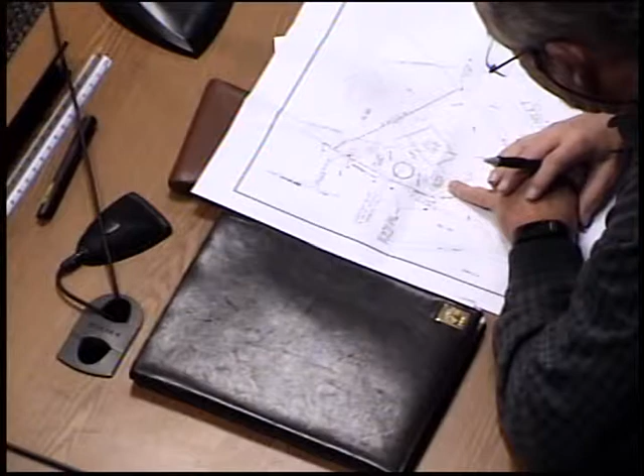Well, if it's not within the wetland, we put it in the plan only to denote that, as part of our plan, that tree is subject to be removed. That's fine, we don't have an issue, you can take that tree.

So if you're going to remove the fence, where is it going? The fence is actually going to go right along our property line. It does not take that jump. It borders right along the flags, as denoted, going right along the flag line. It's not going to go into the wetlands.

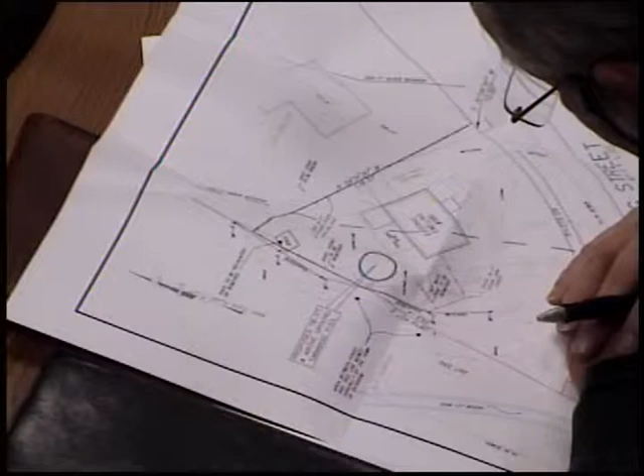The closest it comes is flag number 4, which is behind my shed. So that's the closest the fence comes to the wetland. That will be the new fence. The existing fence is again wrong.

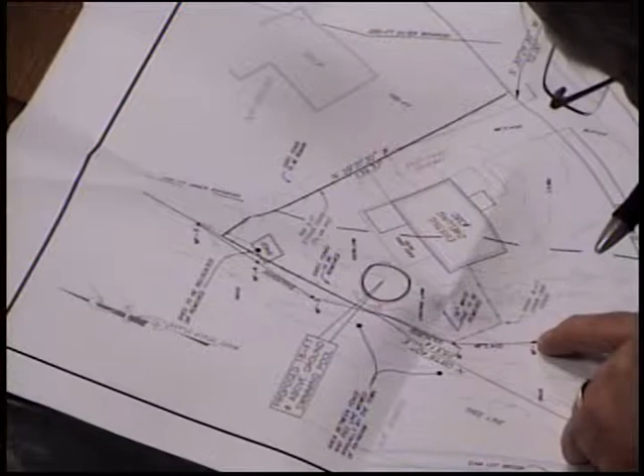So it's not within the 25-foot either, if that's the wetland flag. And this was done, when was this wetland flagged, do you know? I would have to look at my check. It was flagged this year, actually flagged I want to say early November, when we started this process, I believe.

How long have you owned the property? It would be 3 years in August. So I think that's before our bylaw anyway, before we initiated the 25-foot no-touch bylaw. Well, right. So we moved in 2012.

Okay, anybody else have any questions for the gentleman? So you're going to relocate, take that shed out of there altogether? The shed is going to actually be moved, since it's deteriorated anyway over the years, even when we moved in. It's fallen off its own foundation, so eventually it needs to be taken down and reconstructed, but at this present time it's going to stand where it is.

Okay, I do have a question, because I have a pool myself. When we drain the water out through the filter and stuff, where's that water going to go? Currently at this point, we can't drain it into the wetland. That's my point, chlorinated water, that's what I'm trying to get at. You really don't have a lot of play between the pool and the wetland.

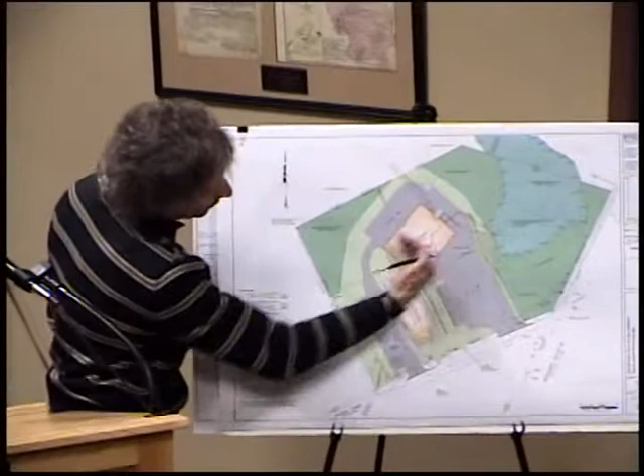Between the last time we met and this time, we got good input from the commission with respect to the site layout and other elements of the design. One thing I'll point out on the revised plans is the parking area. If you recall, we had slope grading going into the 25-foot buffer. We looked at the turning movements within the parking area and determined we could move the pavement edge over so that the pavement is outside of the buffer, and we're going to do a ready block wall along that side.

As opposed, yep. Stone. Stone wall, not ready block. Oh okay, it's going to be a stone wall. So all activity is going to be pulled outside of the 25 foot buffer. Good.

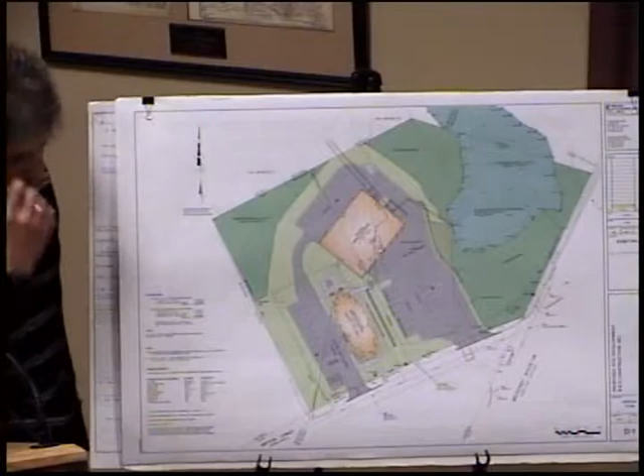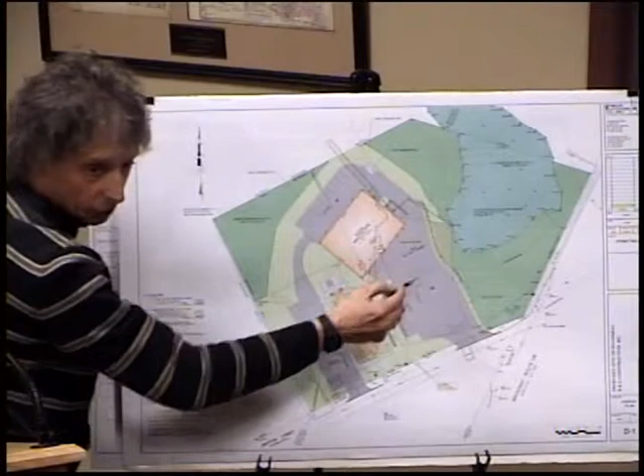The other item we talked about was leaving the post and rail fence as a deterrent for off-road vehicles along the location as shown on the plan. We're going to do stone posts spaced 25 feet on center along the 25-foot buffer line with sign placards identifying it as a restricted 25-foot area, no activity beyond this point.

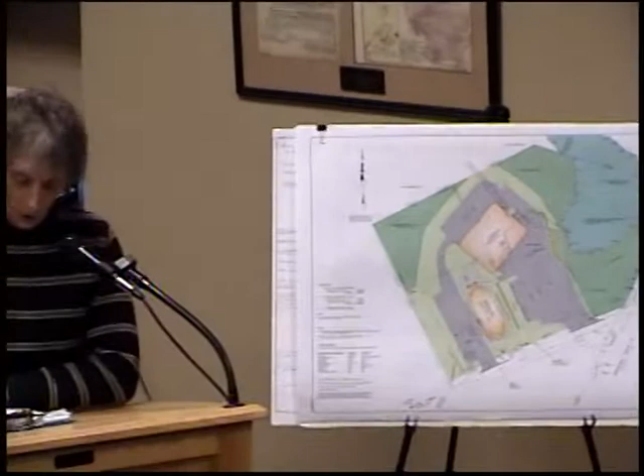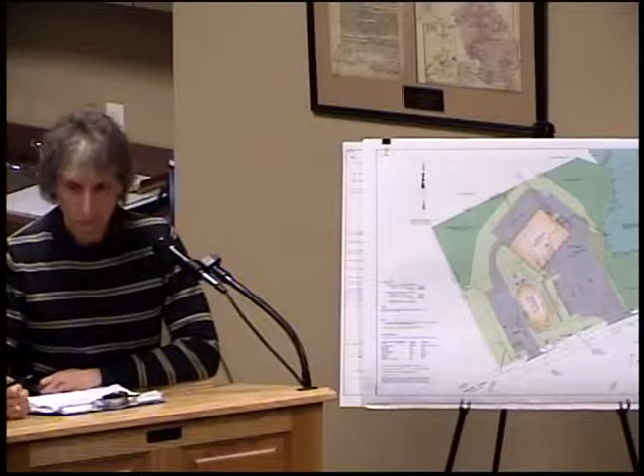I think the items, the fence, leaving it the way it's fine, the post and the sign, we've done that before. That takes care of the first two items.

The third one will be the use of fertilizer and some de-icing chemicals. You're in a zone 4, zone 2 area, so you definitely don't want that. That will be something you can put in an order of conditions.

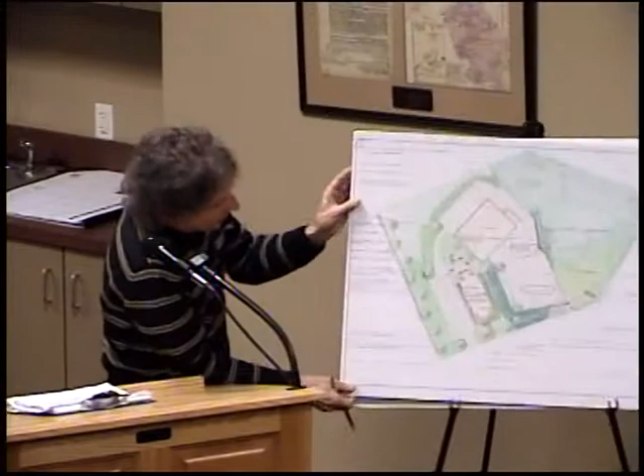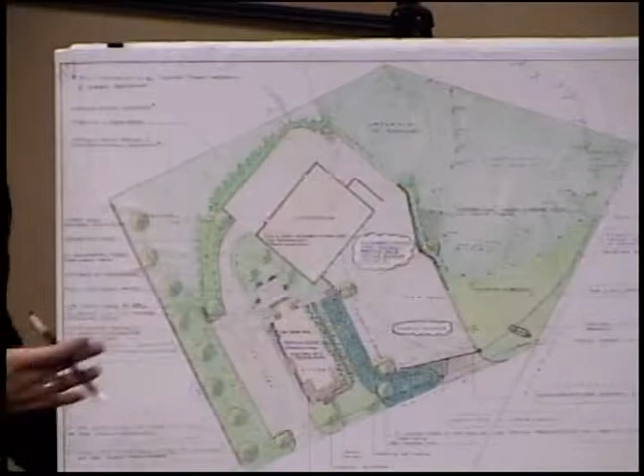That's something we could talk about, because on the landscaping plan, what he'd like to do is use an organic fertilizer within some of the planted areas around the building and around the buffer zone areas. Also this field area, I'll leave that at the discretion of the commission, but we're not going in there, we're not disturbing it, but if there's a droughty year or something and we'd like to keep those plants healthy, one of the options would be to use the organic fertilizer within this area.

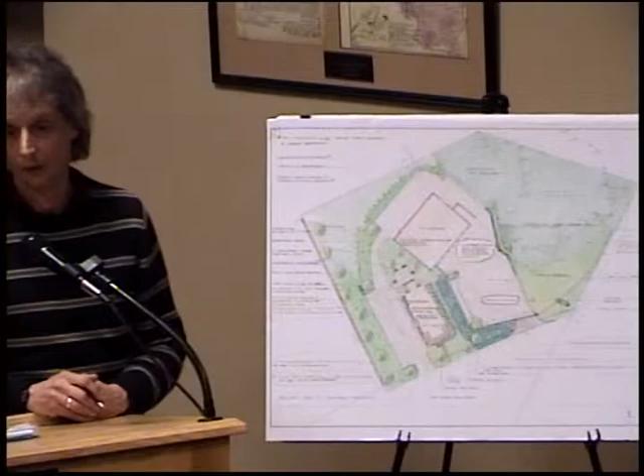I defer to the commission on that. Yeah, definitely nothing like cow manure, so any fertilizer that will not be detrimental to the water resource.

What we'd suggest is a condition in the order of conditions that the owner provide data sheets on the organic fertilizer prior to use. Better yet, we can list the ones that we accept. Like what we did with Walmart.

As well as the de-icing chemicals used on the driveway. Yeah, it would be a non-sodium based de-icing, there's a spray that's applied. We'll give you a list of what's environmentally acceptable. Again, we would suggest as a condition that the data sheets be submitted to the commission prior to application.

On item number 4, we did look at this and submitted it as part of addendum number 1, which should be in your packages. I didn't see any change in your pre-existing condition plan or your watershed plan. Is that addendum number 1 you have there of the stormwater management calculations? That's the original, it should say it right on the title. I said two of them.

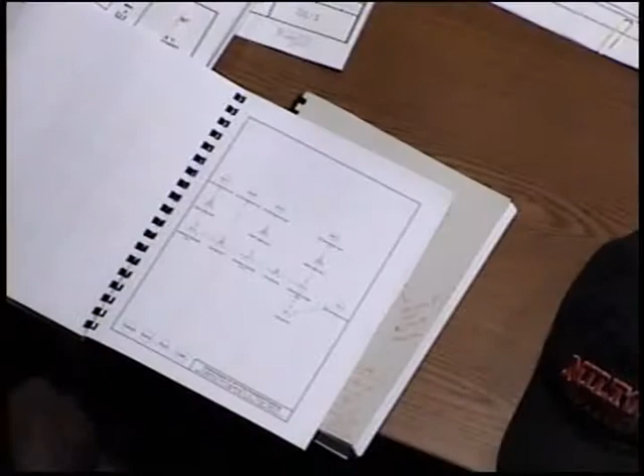We're not going to be able to act on this tonight anyway, because we have to look at this and verify. I did speak with Stephen Trescott - Steve - and he said he hasn't received it, because I guess you sent it to the planning board. The planning board received it - I sent it and I can document that he's received it, over the wire and hard copy.

So we need to take a look at this.

You still have some warning messages that tell you how your recharge number 3 overtops and exceeds the storage. That's a warning - when the model gets above the crown of the pipe, it gives you a warning message. But if you look at the hydraulic profile of this system, it's like filling 3 buckets at 3 different elevations. The difference between the first 2 buckets is 8 feet, and the difference between the lower 2 buckets is 4 feet. There's also a relief overflow pipe on this system at the lower elevation, so I don't see any way this system can back up above the grades - it's in the calculations. We'll take a look at it, but I think after you look at the calculations you'll see it's not going to make a difference in the numbers.

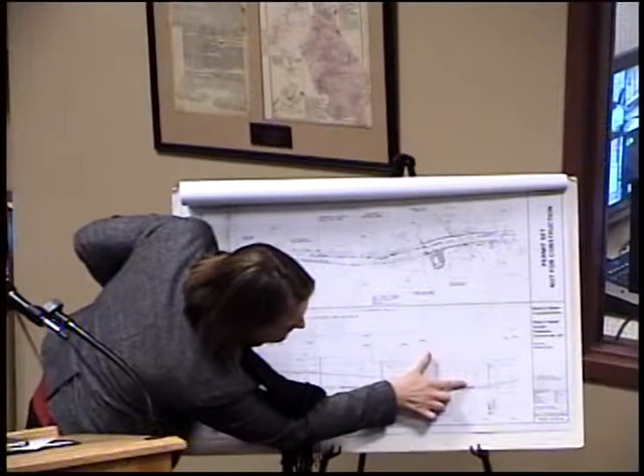The culvert is, at roughly 1 inch equals 4 feet vertically, so it looks like it's about 2 to 3 feet below the bottom of the culvert, which is a corrugated metal pipe at that location.

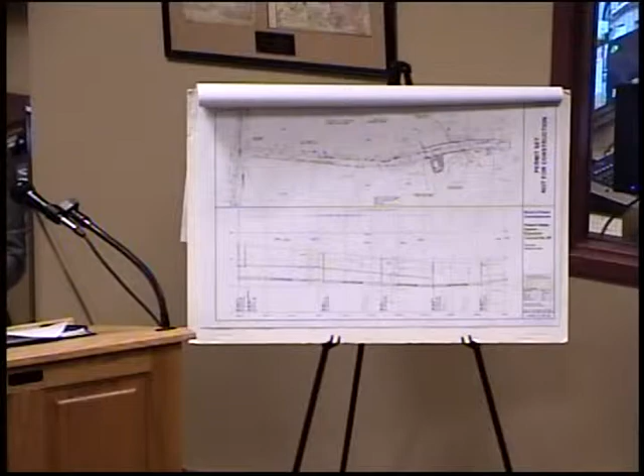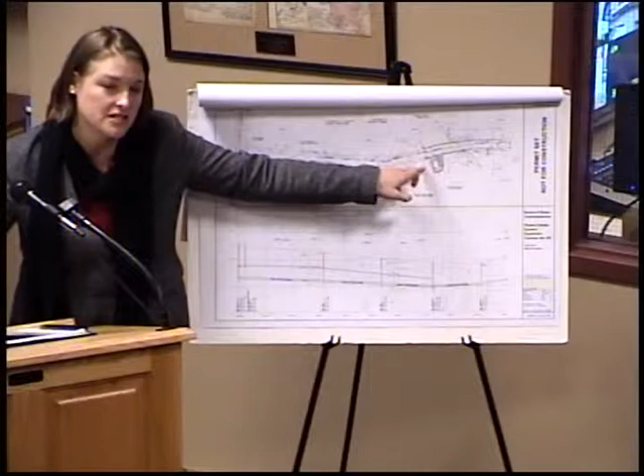So there'll be no need to stop that work. No... Okay, all the pipe work, with the exception of the pipes leading into and out of the proposed pump station, which is also shown on sheet 10, will be in the footprint of paved roadways.

Of course, you haven't had a chance to look at this, have you? Well, how do you propose to work under the river crossing — which one, Furnace Brook or the unnamed intermittent stream on Riverbrook Drive?

Cotton River, contract 4, that was previously permitted by the commission. It's shown on that legend sheet because of the way they're going to put the project out to bid. But contract 4 was permitted with contract 3, which is why, for my own benefit, I included a summary.

That permit was issued on September 17th, 2010, and qualifies for the Permit Extension Act of 2010 and 2012. So that's 4 years for the extension.

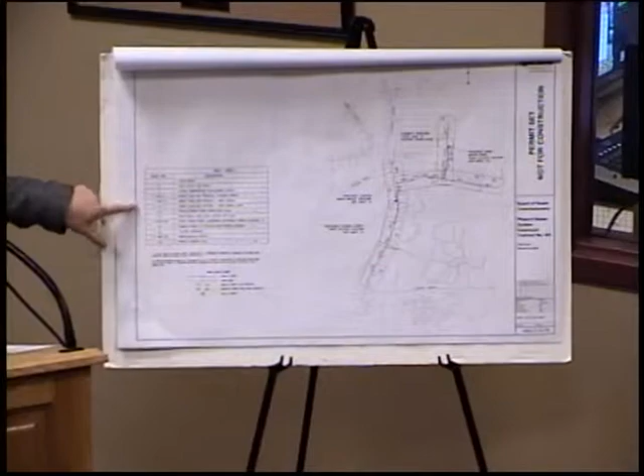I understand for your own purposes, but what you probably should do for us is on sheet 2, our overall sheet, the key plan, actually call out the area of the current proposal. What we have on the sheet index is a list of sheets for a full set of plans, with a note striking through the text on sheets not pertinent to the current notice of intent.

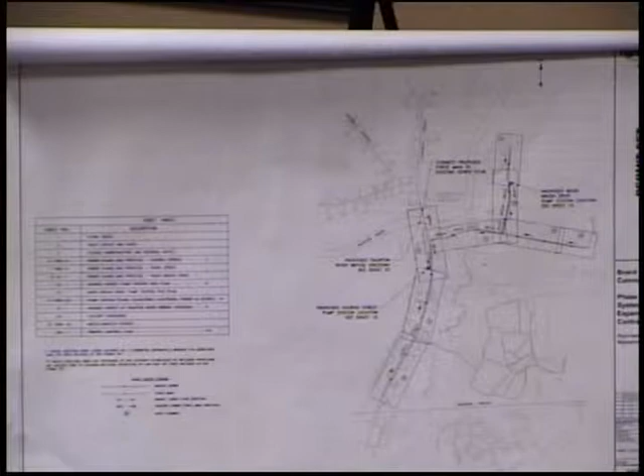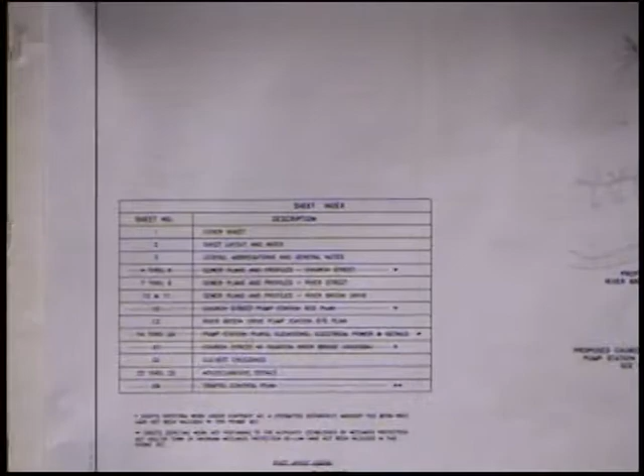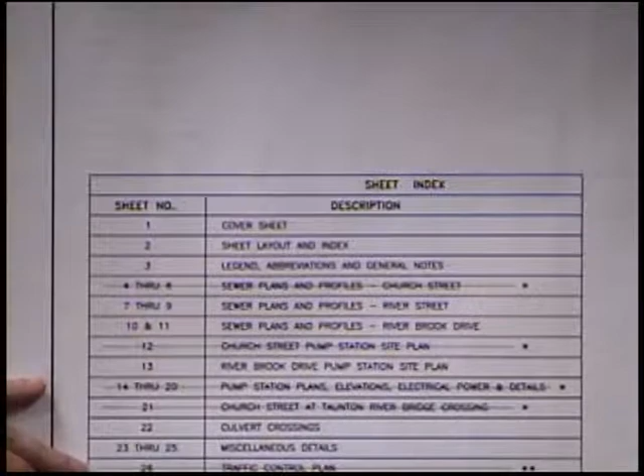So on the index sheet, rather than have a completely separate set of drawings when the project goes out to contract, this legend is what the contractor will see without the strike-throughs, because the contractor will have both permits. But for the commission, we didn't want different sheet numbers that didn't correspond to the set of drawings that goes out to bid. So to maintain that sheet numbering, we took this approach where sheets 1 through 3 are pertinent to the notice of intent because it's the cover, the sheet index, and the legend.

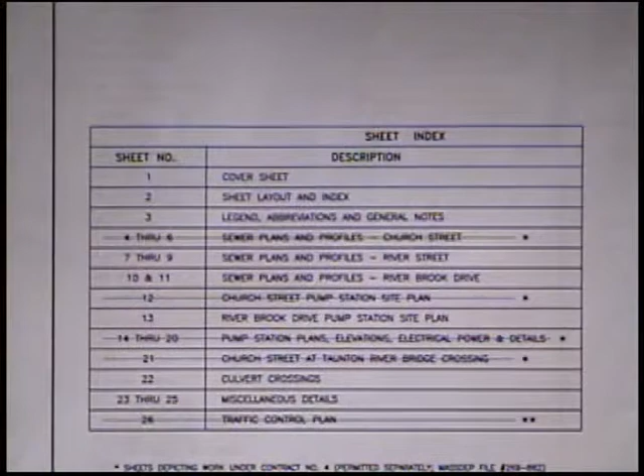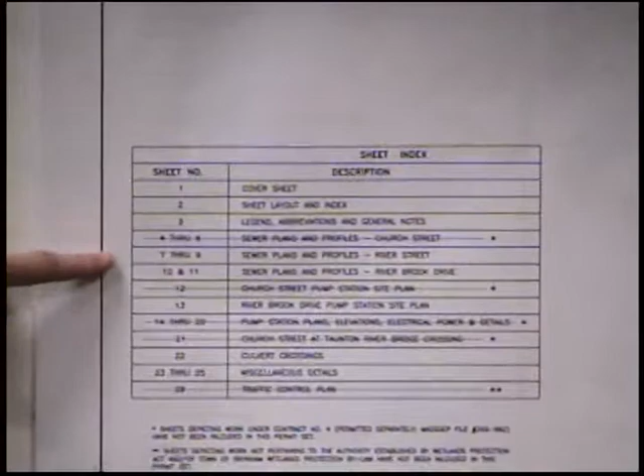Sheets 4 through 6 pertain to work on Church Street, which is contract 4. We've struck that out, with a footnote to that effect including the DEP file number. There's also a pump station proposed on Church Street that was part of contract 4, and the same approach was applied through the list of sheets.

In the event there's a condition or a reference to an activity on a certain sheet number, we didn't want there to be a notice of intent sheet number X and a contract sheet number Y.

So how then do you propose this, because you're saying these are for permit and not for construction, meaning you're going to generate another set of drawings for construction. There's usually more detailed notes, but we'd be open to a condition where, prior to anything commencing, the commission receives the contract drawings. Those won't be set until the project's ready to go out to bid, and it's not ready yet.

But the commission is writing an order of conditions based on plans that will follow, and we're not going to see them. So you're asking for an order of conditions for work yet to be properly defined. Well, the work has been defined.

The more detailed level of information added to contract drawings isn't typically pertinent to the interest of the act and just adds a lot of text. But if you'd like to see contract drawings, we could easily provide them. The alignment will remain the same, the footprint of work will remain the same, pipe depths will remain the same, as will erosion and sedimentation controls as shown on the project plan sheets.